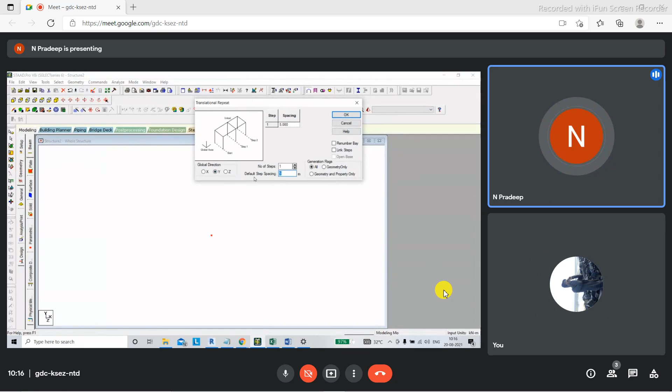With the help of translational repeat, I'm going to create a portal frame. I'm going to repeat the nodes in the y-axis. I'll repeat it once. Let's say the height of the building is 4 meters, so it's almost 13 feet.

Then you have something called link steps here. I'll click on link steps, and now I've created a member. This is a column. A column, or member, will be connected between two nodes. You can see the origin node is here, and this is the second node, which is at 4 meters distance on the y-axis. You can see there's a member called number one, connected between node one and two. Now, how do we identify which is node one and which is node two, and whether the beam number is one or not?

All that we can do is press shift plus N. If you press shift plus N, you can see the node numbers. If you want to see the member numbers, you have to press shift plus B, B as in Bombay. You'll press shift plus B.

After that, I have to create a frame. Let's say I'm going to analyze the kind of structure you're sitting in right now, a room. That room will definitely have four columns in the corners, and those four columns will be connected using beams. Let us assume your room's dimension is 10 feet by 10 feet.

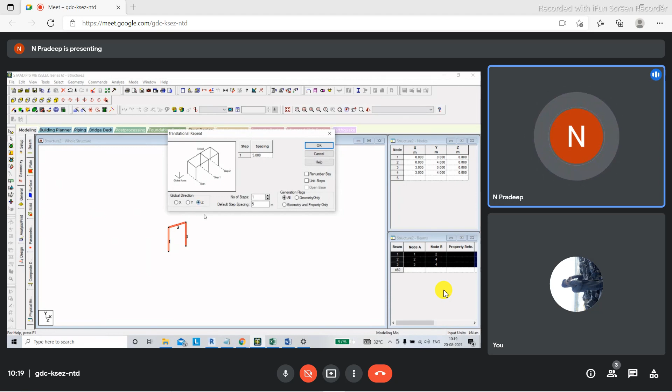Next, I'll select the whole frame, both the columns and beams. Now I'm going to convert this into a three-dimensional structure, since a room is a three-dimensional structure. I'll select it and go to geometry, then translational repeat, and this time I'm going to repeat it in the z-axis since it's going to be three-dimensional. I'll repeat it once, and the distance is going to be 3 meters.

Then I'll set link steps and open base, and click OK here. So I have created the room in which you're seated. You can see the beam numbers and column numbers and everything.

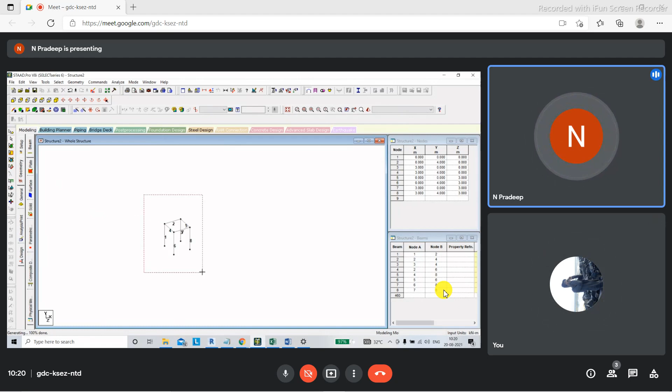Now this is translational repeat. Now what we are going to see is how to do circular repeat.

I'll switch on the grid. Put the heading as circular repeat.

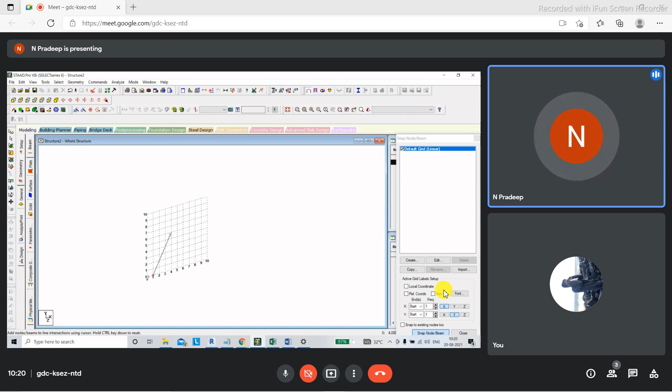Now, generally, when you're trying to draft a model in grid mode, what happens is you're just making a click, and then what follows it is a continuous beam that actually follows it.

So put the heading as circular repeat. Generally, when you're in snap mode in STAAD.Pro, if you're making a click, let's say you clicked a node, after that if you just hover the cursor, continuously you'll also get the member. Apart from creating the nodes, it will also create the members as well. So if you want to avoid creating the members, what you have to do is...

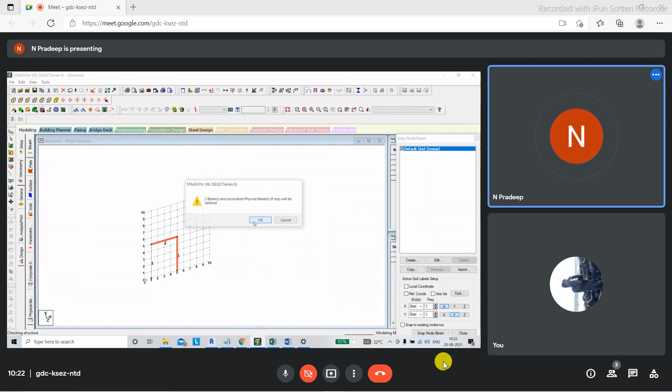If you want to avoid creating the members, when you're snapping the node, you snap the node like this, press on the control key, and then move the mouse like this. You press the control button, and then you can see that the member has not been created. Only the nodes will be created like this.

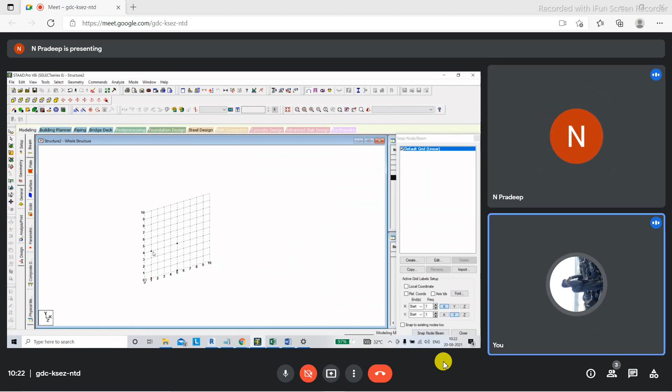So now I'll just add two beams here. I'll teach you how to add beams. I'm going to add one beam like this, and again place a node like this. Now I'm switching off the grid. Now you can see that we have a member and then we have a node. Okay, ignore these two nodes now.

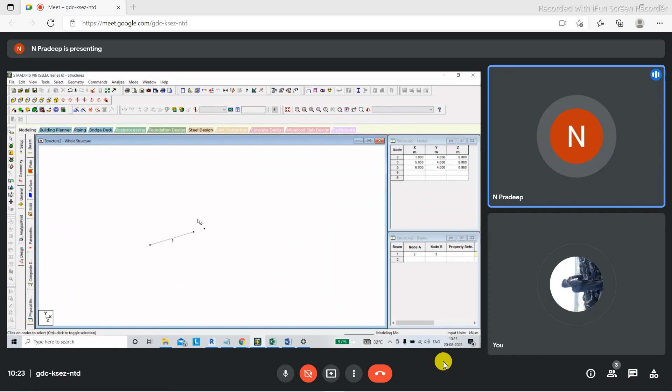We'll ignore these two nodes. Now we're going to perform circular repeat. You can see it in this option here. Either you can select it from here, or you go to geometry, where you have circular repeat.

So if you go to circular repeat, you can see there are some options that we need to select. The first option is axis of rotation.

If you want to understand the axis of rotation, think of our childhood days when we would draw a circle on paper using a compass, when studying geometry.

Now let us assume you place the sheet of paper on the floor that you're sitting on. You take a compass. Now the paper that we are going to draw the circle on is actually on which plane? Remember the sign convention as I told you yesterday. If you place the paper on the floor, on what plane has the paper been placed?

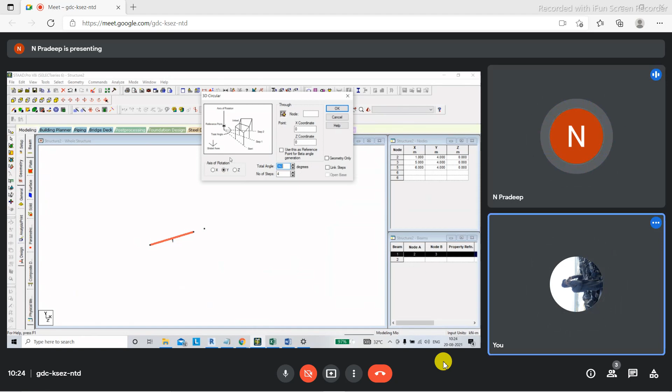Now you're facing a wall and sitting right in your room. To your left hand side, you see a corner in that wall. Now that vertical line in that corner is the y-axis. You can see it here in the screen, in the left bottom of the screen. This y-axis is your left side corner in the wall. The x-axis is the line formed in the bottom of the wall which is right opposite to you. You have a wall on the left side. The line on the bottom of that wall, which is on the left side, is your z-axis.

Now imagine I'm placing a mirror on the wall that is right opposite to you. Now, what plane is that mirror hanging on? On what plane is that mirror hanging?

Did you understand the axis that I told you? Yes sir, but I'm getting confused here, can you please repeat once again? Now you're sitting in a room, right? There's a wall opposite to you. Is there a wall opposite to you? Yes, sir.

There's a wall opposite to you. Is there a wall towards your left hand side? Forget about the right hand side. Is there a wall towards your left hand side? Yes, sir. Okay, fine. And you have a floor on which you're seated, right? Yes, sir. Now, the floor, the wall on your left hand side, and the wall opposite to you, all these three things join on a corner, right? Yes, sir. Do they join on the corner?

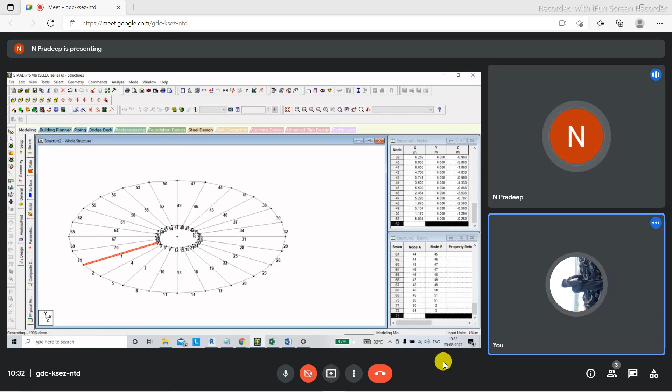Now I'll just link steps and then click on OK. You get a circular repeat like this. If you see from the top view, since I want to see what has been drawn on the floor, you can see that the circular repeat has been carried out like this.

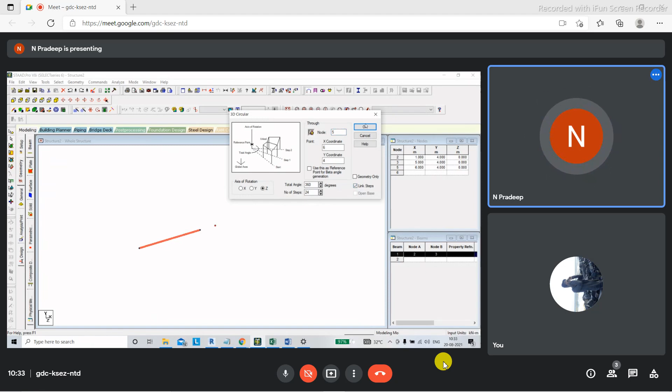Now I'm going to perform circular repeat on the XY plane. Select it, circular repeat. This time I'm going to select the axis of rotation as Z axis. I'll give the value as 24. Node is 5. Link steps, OK. So it will be like this. If you see it in front view, the circle has been created. So this is circular repeat. Clear so far? Yes, sir.

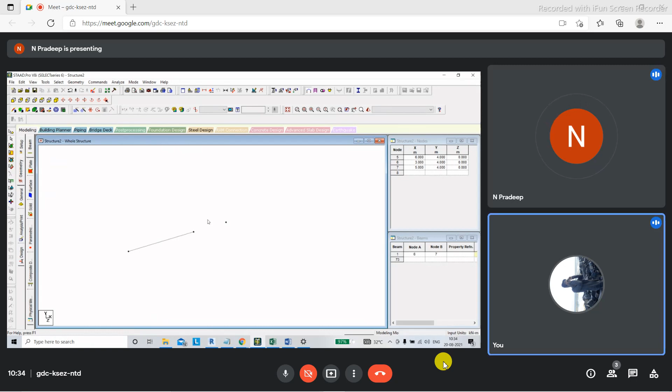Next, put the heading as mirror. Now I'm going to place a member here. I drew a member and there's a node over here. I'll remove the grid, and in isometric view you can see the member and the node. Now I'm going to select the member like this.

Then you have the geometry tab. In the geometry tab, you have mirror. So you'll select the mirror like this. After you select the mirror, there are certain options that need to be selected. The first option is the mirror plane. You have to select the right mirror plane here.

Mirror plane means, let us say, if I place the mirror on the floor, on what plane is the mirror placed? X and Z. If I hang the mirror on the left side wall? XY. Observe clearly what I'm saying. If the mirror is hanging on the left hand side wall, on what plane is it hanging? Y and Z, sir. Exactly, very good. So the mirror will be on the YZ plane.

And if I'm hanging the mirror on the wall opposite to you? Then it's X and Y, sir. Exactly. Now if the mirror is hanging on the XY plane and you want your image to be reflected on that mirror, on which axis will you have to stand? Can you repeat, sir? The mirror has been hung on the XY plane. You want your image to be reflected on the mirror. Then on which axis will you stand?

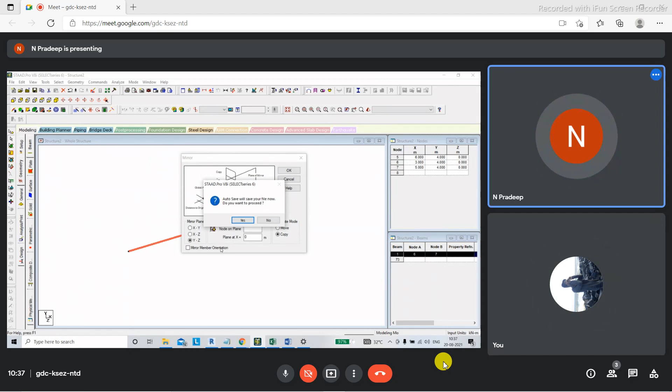Correct. Now I want the mirror object here, the same beam, to be mirrored in the X axis. So right now the object is in the x-axis, and I want the reflection object also to be in the x-axis. If that is the case, I'll select the mirror plane as YZ. Understood? Yes, sir. And I'll have to specify the position of the mirror. So I'll select the node and then I'll place the point here.

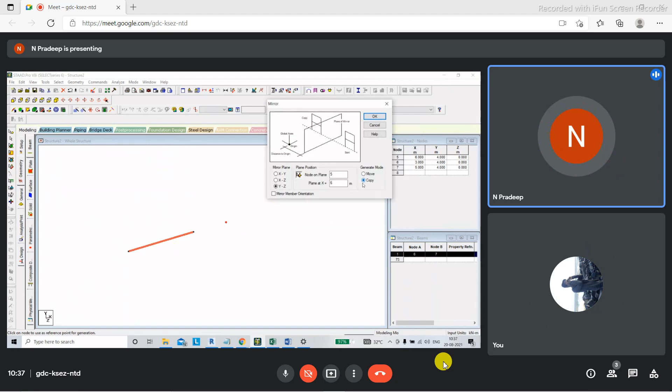Now it'll ask you whether you want to create a copy or you want to just move this member to that point. I want to create a copy, so I'll select copy here, and then click on OK. So now you can see that the object has been mirrored. Clear so far? Yes, sir. So this is the mirror option. The next thing we'll be seeing is how to add beams from point to point.

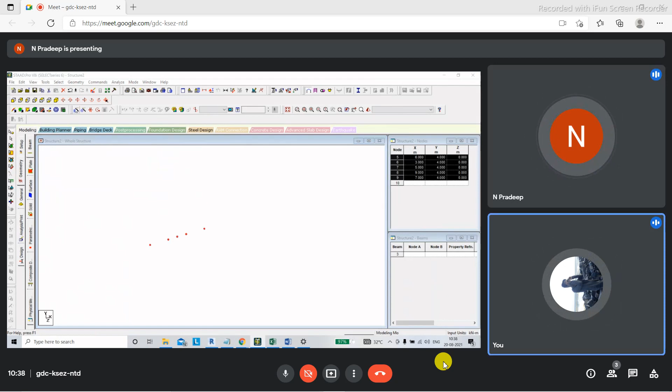Let us say I have certain points like this. Now I'm going to put the heading as add beam using point to point. Write down the heading as add beam from point to point. Yes, sir. So I'll go to the geometry tab here. In the geometry tab, you have the add beam option.

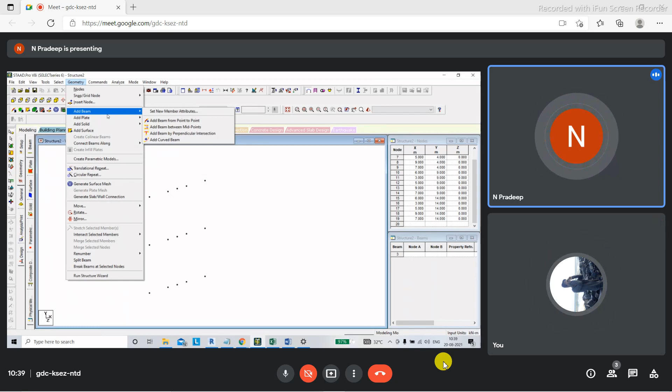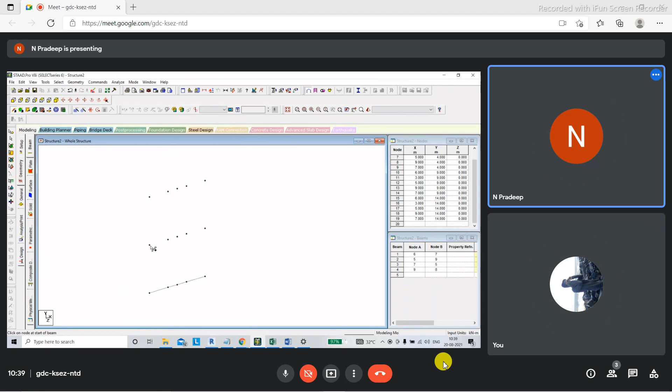In that add beam option, if you closely watch it, you can see that there are four options to create the beams. If you just go and click on add beam here, you have four options. The first one is add beam from point to point. Select that, and then you will add beam from one point to another point. Like this, you can add certain points. Clear? Yes, sir. Like this, you can add beam from one point to another point.

Next, go to geometry, and in that add beam, you have an option called add beam between midpoints. Select that. Now you have two columns here. I want to create a beam which is exactly connecting between the midpoints of these two columns.

So I'll just click on this here, and then I'll click on this here. And I can see that though I clicked somewhere else, it is still creating it in the midpoint of that particular column. Okay.

Why have you created beams at the midpoints or nodes? Do those nodes act as a column also? That is how I created this column. That's a column, okay. We have created the beam in the midpoint, right? So at that point there will be only a beam, or will a column also be created? You mean whether this has been converted into a column? No, at the mid nodes, sir, the midpoint nodes where we created the beam. Are you getting my point, sir?

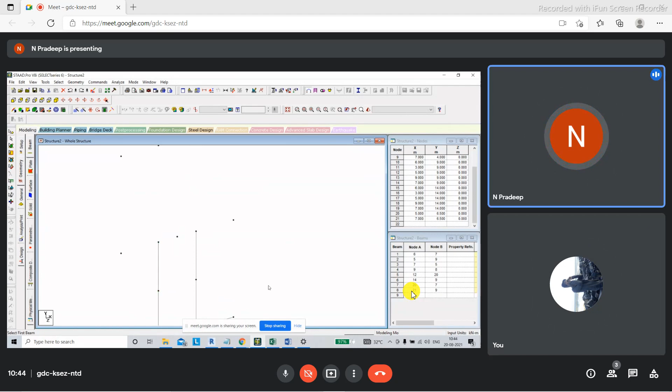What was your doubt? Can you please share the screen, sir? Yeah. What was your doubt? Like we have created the beams at the midpoint, right? Yeah, I created this one. That simultaneously there will be nodes? Only when I created, the nodes were created. See, again I'll do. Before that, the nodes were not there. It was like this, correct? There are no nodes.

So what I'll do, I'll go to geometry. In geometry, I have add beam. I'll go to add beam between midpoints. Now you can click wherever you want, but it will be created from the midpoint only. The moment I create that beam, you can see that 2 nodes have been added here. Yes, sir. Now what is your doubt? Now got it, yes, sir.

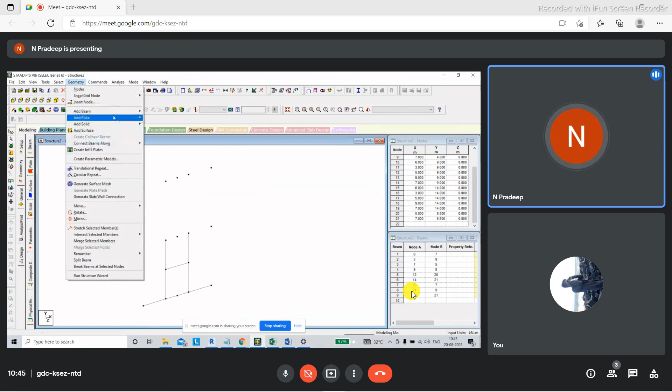The next thing what we'll be seeing is go to geometry. You have add beam. In that you have add beam by perpendicular intersection. So what I'm going to do is I'm going to draw another 2 nodes here. Now I'm going to add beams in the perpendicular intersection.

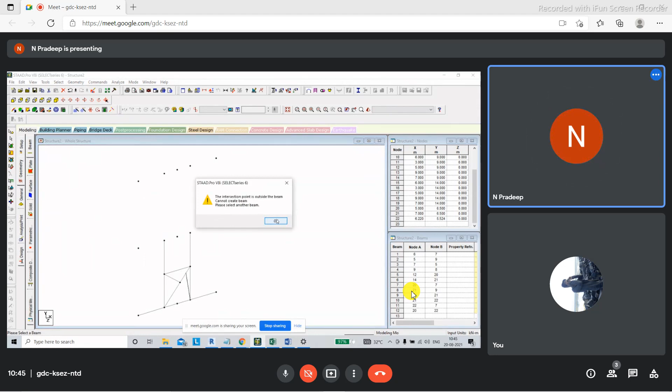So I'll select this particular beam point here. Now from this point to this member, a column or a member should be formed in a perpendicular manner. So I'll just click somewhere over here, and I can see that it is formed in a perpendicular manner. In the same way, you can click wherever you want. You can see that it is formed exactly perpendicular to it. Clear? Yes, sir.

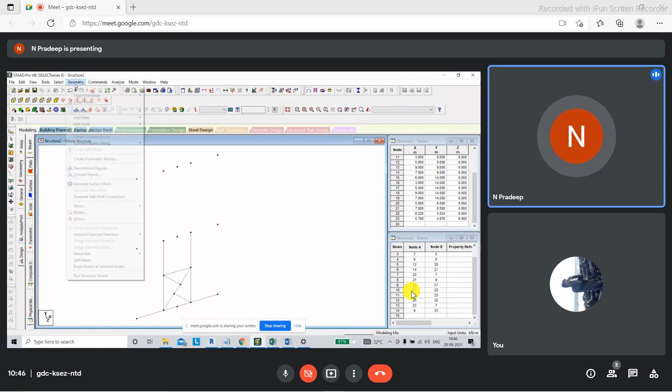Next thing what we'll be seeing is curved beams. Put the heading as curved beams. Now I'm going to create a curved beam. So go to geometry. In geometry, you have add beam. There you have add curved beam. Click on it. After you click on it, select the 2 points. You'll get a window like this. It will ask for the radius of the curvature of the curved beam.

So I'll just give it as, let's say, 2 meter, and let the angle be 0 degree. If I give the angle as 0 degree, it will form an arch like this. This arch can be seen in the front view, whereas it cannot be seen from the top view. Yes, sir.

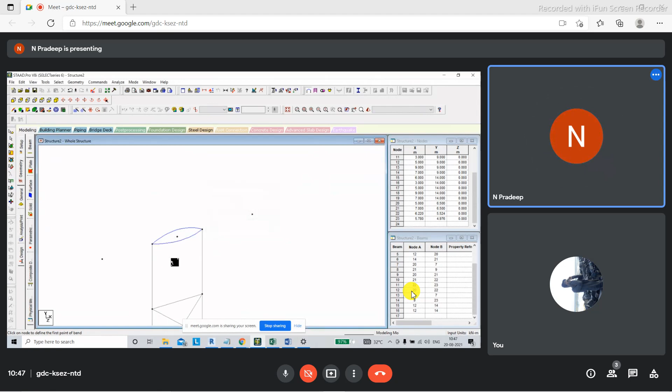Now, if you want to see the arch from the top view, I'll again create a curved beam, and this time I'm giving the same radius of curvature as 2 meter, and the angle gamma is 90 degree. So now you can see the curved beam from the top view. Clear? Yes, sir. So this is what a curved beam is.

Next thing what we'll be seeing is how to edit a beam or column that has already been created. Is there a possibility for us to add nodes in between, or to add members in between? These things can be done using this. So I'll go to geometry. In geometry, I'll select the... Wait, do one thing.

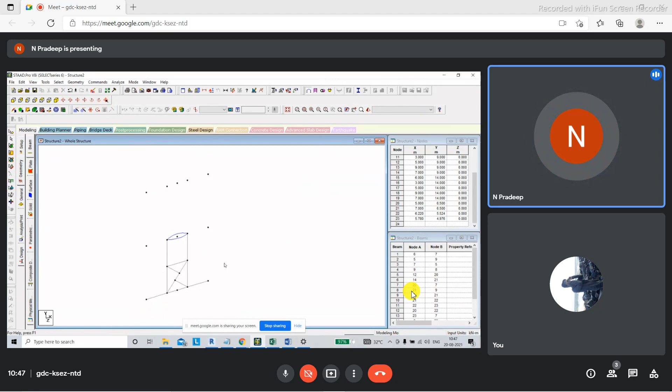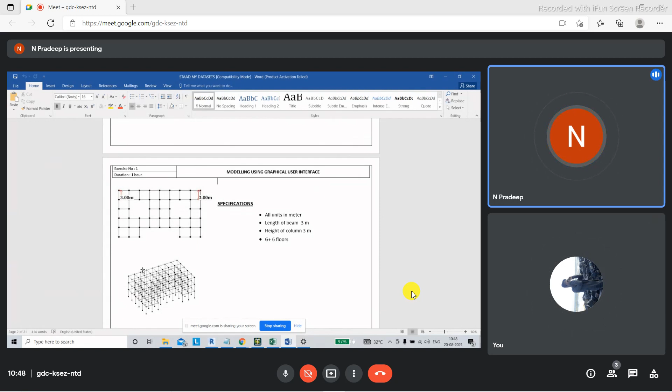You practice till what I've taught you now, because you have to finish this model. I've taught you mirror. I have taught you all the tools required for creating a model. Now, the next topics will be related to modifying the created model. That we'll be seeing later. Now just practice what we've seen. Try to create this model that I've done here. Yes, sir.